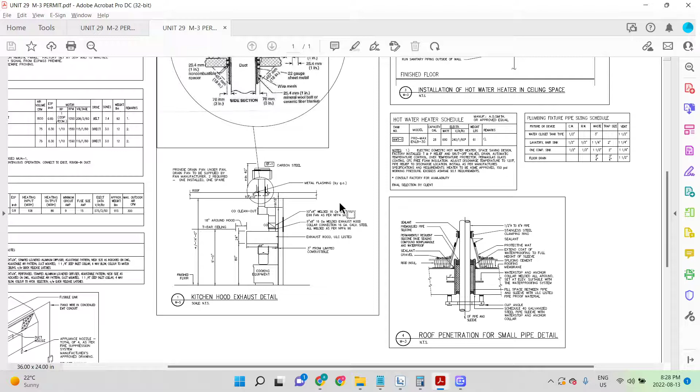Hello everyone, this is Anam from Eden Plumbing, and today we're gonna go into a little bit more detail on a very small job. I'm only gonna discuss the small jobs in the videos because the big jobs can become repetitive and you lose concentration. As long as you guys can do a smaller job, a bigger job is pretty much the same.

So today I'm gonna go into sections. I'm gonna make four sections. I'm gonna show you how to do the underground drainage. The next one will be how to do the wall plumbing. The third one would be how to do the ceiling. Fourth will be how to do the fixtures and combining everything together and coming up with the price.

So these jobs, as long as you know the material, you can price it. I've done a couple of them. My estimate, just roughly without looking at this, would be around... one, two... You're looking at around 9 to 10 thousand dollars worth of fixtures and piping.

So around $5,000, 4,500 for fixtures, and you're looking at 1,500 for underground, so that's 6,000, 2,000 for the wall plumbing, that's 7, 8,000, and then another 2,000 or 1,500 for upstairs. So 9,500. To do the job, it would cost me

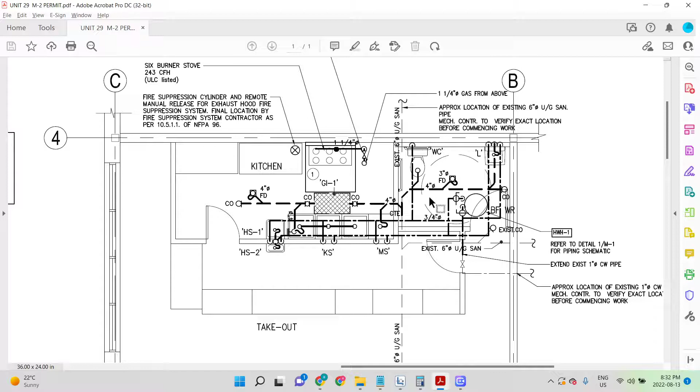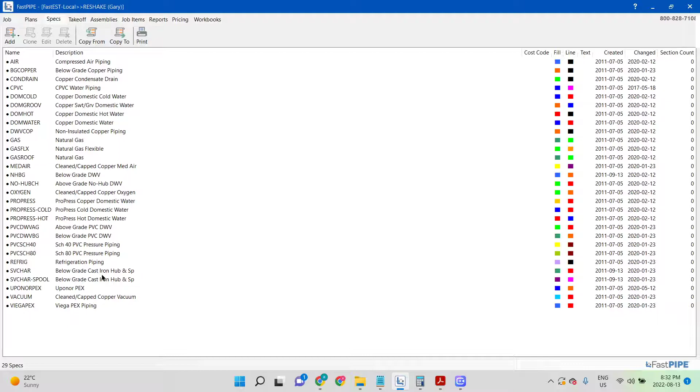Again, I'm gonna do the takeoff. Since it's underground, I'm gonna use inside pipe. Oh, I don't have it, so I'm gonna go here. Go to specs. Delete all these, and then paste it because I did that recently. Now I go for my underground.

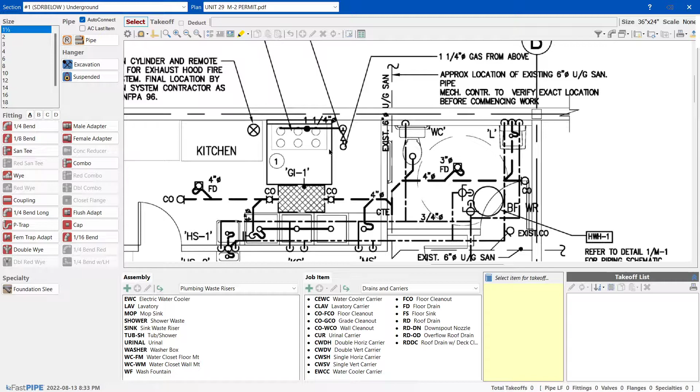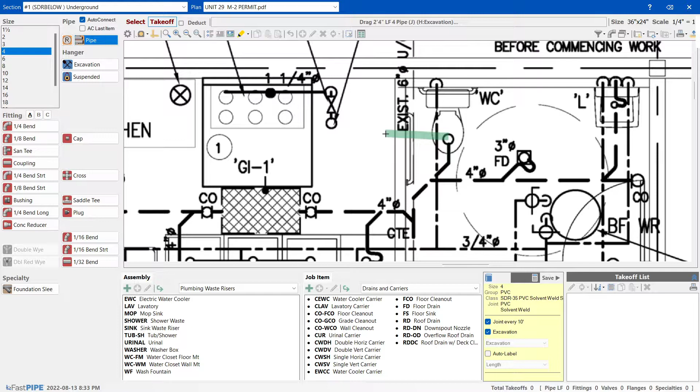It says connect to existing, everything connects to here. So there's a pipe that's going here, probably there's a clean out. I'm going to assume there's a pipe, so I'm going to put the scale as quarter inch. I saw it earlier. Let me confirm this. 1.8, 1.7. So we're good. We're not 3 feet or 6 feet or something. So the scale is right.

Let's continue. 4 inch coupling, 4 inch coupling, 4 inch Y, a 4 inch Y to bring it up, 4 inch SDR, street 45, street 45. Now I need another 4 inch Y for the vertical side, another street 45, 45 here. A clean out because you're raising it. Yes, so the clean out should be here. You have a 45 here.

This pipe can go this way. Here's another 45 going that way. I'm going to start this line first and see how this is. It's a pretty common one that we use all the time. So we are going to do this properly now. I'm going to put a 4 inch Y here. And then I'm going to, you know what?

I'll do it exactly that way. The venting works. They would allow me to do that, so there's nothing we're going to do. So, 4 inch Y, 4 inch 45. I'm going to put a 4 by 3 inch adapter reducer here. Everything becomes 3 inch: 3 inch Y here, 3 inch 45 here, inch and a half, 3 inch 90 here.

Now riser, because we're going to raise it up 2 feet. I'm going to raise it 2 feet. And then I'm going to put a toilet flange, and that completes my toilet. Now I'm going this way to my floor drain. Remember, we have to do venting as well, but this way the design the engineer did sort of works for us, so we don't have a problem to do that.

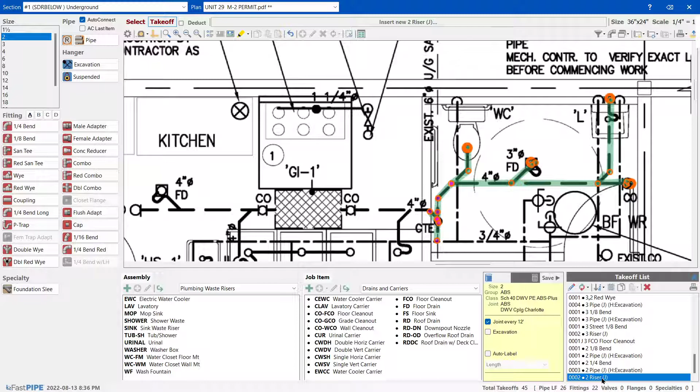2 inch Y, 2 inch riser, and this I leave it for here. You know what I'm gonna do? Yeah. So this is perfect. Now I move to this one, and let's see what this is. This is a mop sink. So we already know what a mop sink is, right? 4 inch, 4 inch Y,

4 by 3 inch reducer, because every time you connect SDR pipe, I don't know if you noticed, but this is the specs we are using, right? So this is very important. This is the specs we're using, and this is your System 15 SDR pipe, which is 4 inch and above. This is your ABS pipe, which is saying that any pipe that is 3 inches or less will use ABS. Any pipe that's 4 inches and above, we're gonna use SDR.

You know what I'm gonna do? To make it easier for you guys, I'm gonna, let me see, how did I do that? I did it before. No, no, there was something. Oh yeah, no, that was a complete package. I don't want to change the complete package. I want to have two separate colors. Anyways, I'm trying to do the color. I'll figure that out, as I don't have a color code.

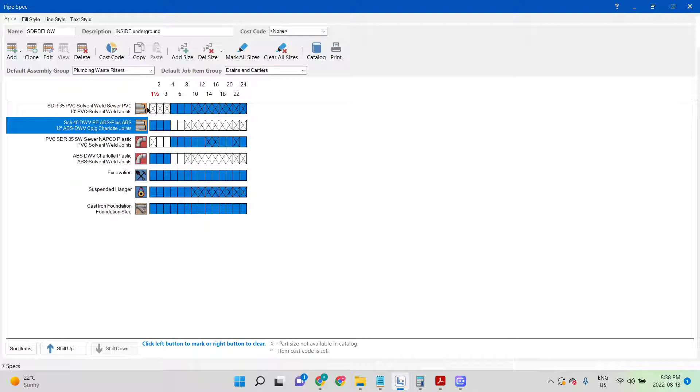Anyway, so if it's 3 inches and less, it's ABS. If it's 4 inches and higher, it's a System SDR pipe. So therefore, when you're changing this pipe, how are you going to connect them, right? That's the most important question. When you come across pipe changes, you need to use a special fitting, right? So that's what I used over here. It's 4 by 3 inch.

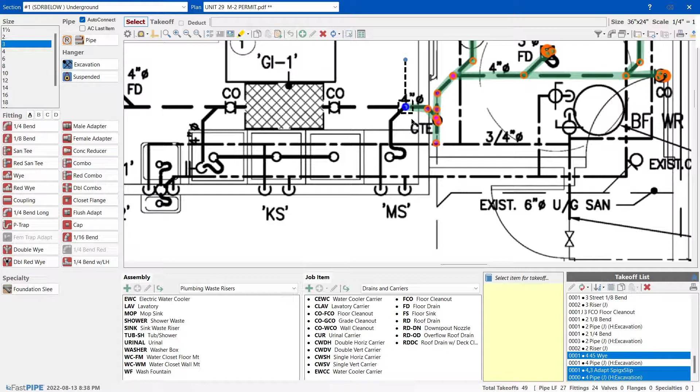We call it a 4 inch SDR to 3 inch ABS adapter. So it's 4 inch SDR conversion to 3 inch, and it's an adapter. A lot of plumbers in the field would know this. This is more important for the person who is an estimator, because this information is not shown to you over here. So this is very valuable for that. So, anyways, this is 4 by 3 inch. We added it over here. Now 3 inches come in here.

All of a sudden, you will see that it'll start accepting 3 inches here. The minute I take this off, let's say this is a 4 inch pipe. The minute I put 4 inches, it's gonna start accepting me, right? But the minute I put 3 inches, it should not accept me. You see, it's not accepting me here. But the minute I go 4, so this really helps, right? Now if I do, watch, beautiful.

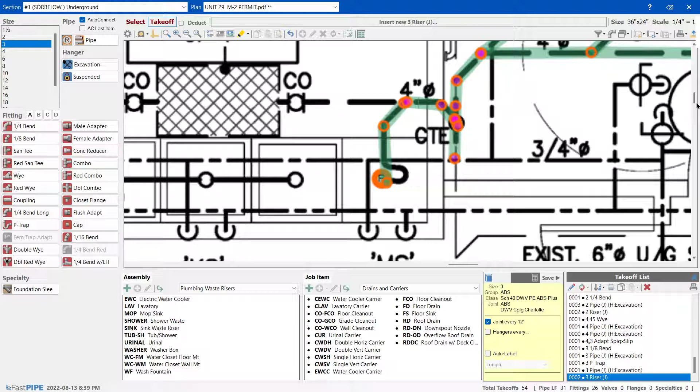So it's a mop sink, it's not a floor drain, so a pipe just sticks up, and that's pretty much it. In the next videos, I'm gonna compile a lot of on-site examples, so you will have a better understanding. Now you can see that I never put a vent for this one.

I put a vent for this one as this was wet vented. That's why if you notice, this is a 2 inch line, right? If you look over here, it's a 2 inch line. This is gonna be a 3 inch. This is 3 inch. So basically, I wet vented, flowed into this. But when I do this, I'm not wet venting anything.

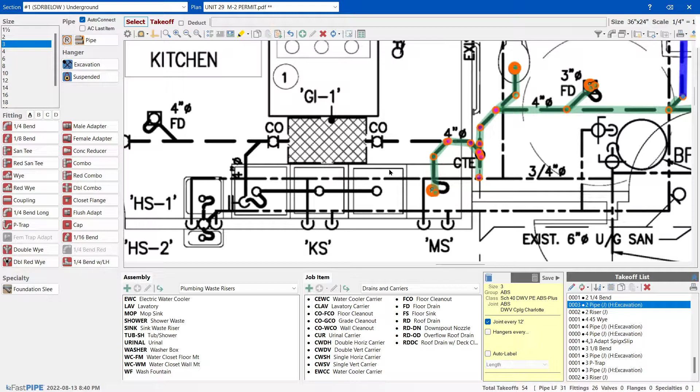Yes, I can use a circuit vent, but there's no space for a circuit vent. So what am I gonna do? Actually, you know what? There is a vent over here, but to be honest, I never did it, so I don't know if I'm allowed to use that. What I'm gonna do is look for a sink nearby to see if I can wet vent that. I don't really see one. I see this sink here, but it's upstream.

This drain, I have no idea what they're trying to do with it. They didn't even connect it to anywhere. Are they gonna bring it from here? Then we have to connect it from this side. If this was downstream of the grease trap, beautiful. I just bring a 2 inch pipe up and connect it here and here. There's gonna be lots of pipe here, so this idea is not gonna work.

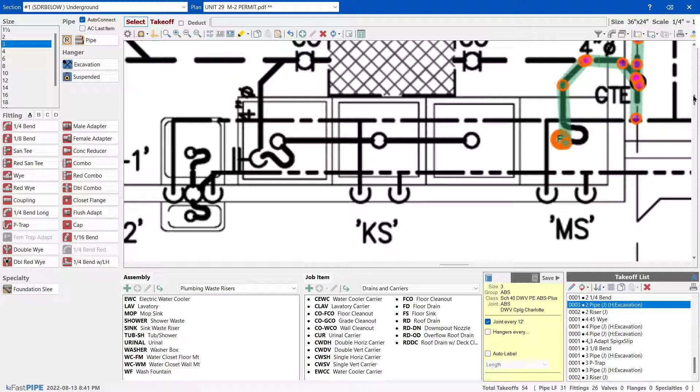What I'm gonna do is just keep it simple. I'm just gonna cover myself by a, what do you call it, just a fixture vent, individual vent. That's the term, individual vent. Gotta revise my code book.

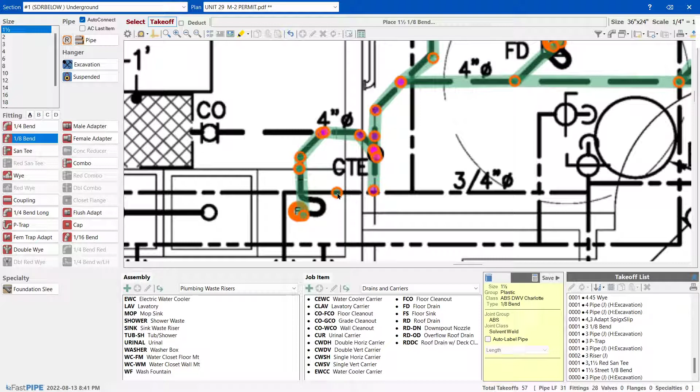You get your 2 inch, inch and a half, right? Inch and a half, 45. Now I can put a 45 here. So this is what it does, and then I can just put a pipe straight up into this pipe right here. I can move it a little bit here to make it easier, right? And inch and a half, 90. Since I am bringing my pipes from that area, afterwards when I do the other ones you will remember.

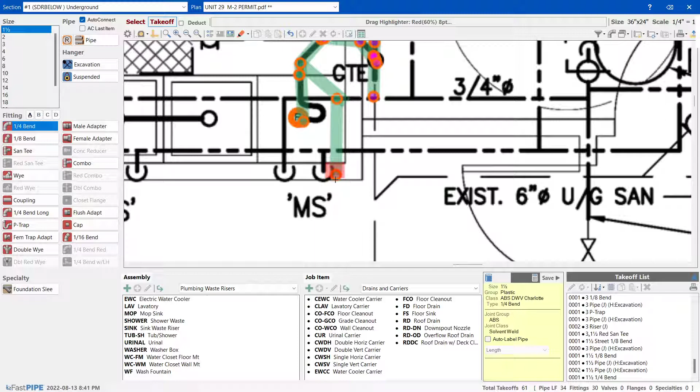I'm gonna mark this. Why it's important to mark this, you will know in my next video when I do the wall plumbing. These are the areas that I'm marking where the pipes are sticking out. So 2 areas we have marked. We have 2 inch pipe here, we should have an inch and a half pipe here, and then I need to have a riser, so I'll put 2 feet riser. 2 feet, not 21 feet. This is done. I continue here.

Now in this drawing, you will see a grease trap, but a grease trap does not just simply have that. It has a lot more things in there. So we're gonna put a 4 inch wye, right? And then we're gonna connect this. It didn't pick it up from here. Why didn't it pick up? It's a 4 inch wye, so I did the right job. That's fine.

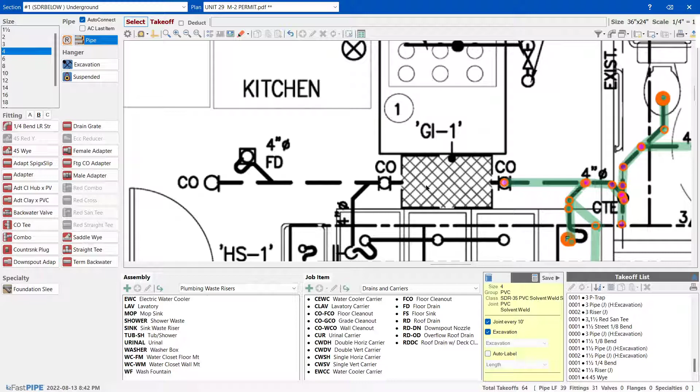The rule is you gotta put a clean out, which they show you, and a vent upstream and downstream of the grease trap. They both have the clean outs here, but they don't have the vents. So we're gonna put some vents. I'm gonna look for a close by wall when I look for vents. I can put a vent here, this is close, but I would like to put it here. Why? Because then I can connect all this in here.

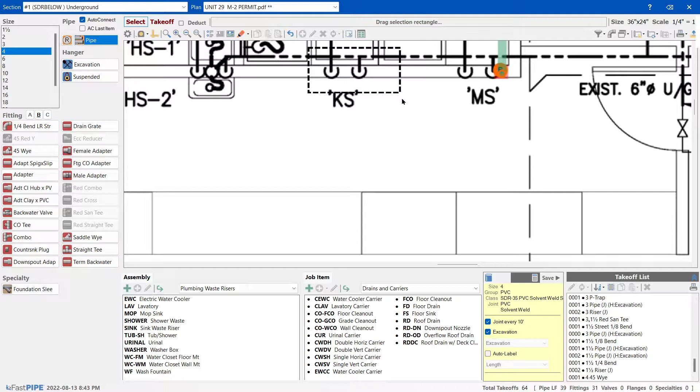Even if this wasn't here, why did I bring it here? The reason is I will always choose a wall where there is a sink. You have a sink here, you have a sink here. For example, I'll just open one of the other jobs to show you what sink plumbing looks like, because I should make more of these elevation drawings, you understand?

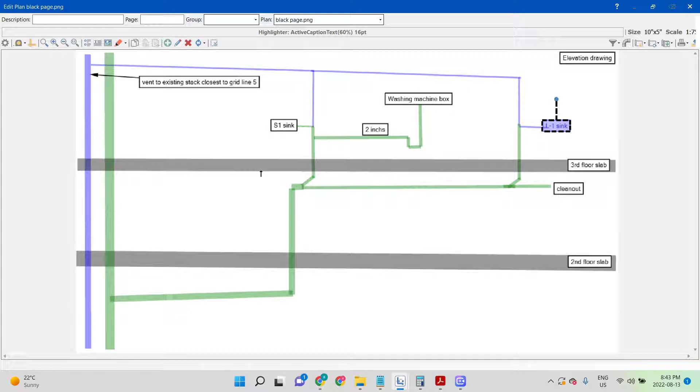So if I put another vent from here, I can just connect it. For example, I can just connect it like that to this, or I can just go and connect it up there, right? So these are really good areas to focus on when we are trying to do wet venting, or when we are trying to bring vents for the other fixtures. And this is a very cost-effective way to do it.

Now I use a street 90, street 45 to angle that fitting there. Now it's angled. I use another 45 to make it horizontal. And then I use a pipe this way and then this way. And then I put a 90. Come on, come on. 90 and a riser for 2-inch. And since I was again coming in the wall, I go this way. Beautiful. Now I'm going to continue to this way over here.

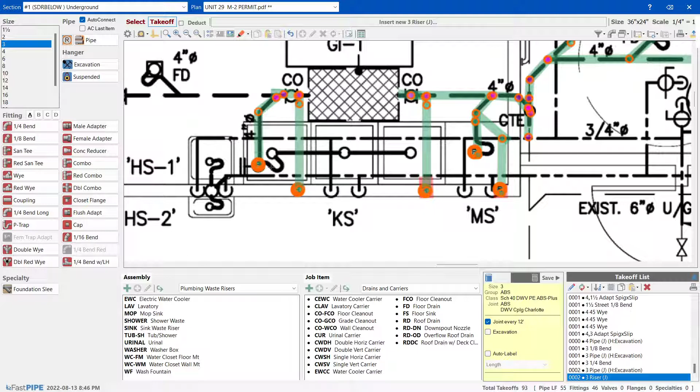So anyway, this is a 4 by 2. It's in here. It's up, and we leave it at that. Now we keep going backward, and for example, if this was in here, I'm going to assume that. I shouldn't assume it, but it's a small job. It really doesn't matter to take a risk. We could call the owner, the client, for this information. He won't have that. So trust me, you're not gonna win anything. You just have to assume at this point.

If it was a bigger thing, you'd send an RFI. It's a small job. They don't even care. They don't even know what an RFI is, some of the contractors that we work with. So anyways, that is in. Why I didn't need a 3-inch.

I'm gonna go back. You know what I'm gonna do? I'm gonna show you something else. So, for example, this is 3-inch. This is a 3-inch pipe, 3-inch riser, right? But let's say you don't want to put 3-inch. So what you're gonna do is you're gonna change this. So let's say, for example, I change this to a 3 by 2 inch wye, right?

And you did all this work, and somebody says to you, no, no, no, it's supposed to be all one thing. So instead of changing everything, you can just go here and you can say size. You can say 3-inch, I want to make it 2-inch, and boom, everything becomes 2-inch. This is a very small example, but if it was a big job, you could have done that.

You could have done that. Here's another way of doing this, 2 inches. So it's very nice software. If you did a lot of work, it will help you save it.

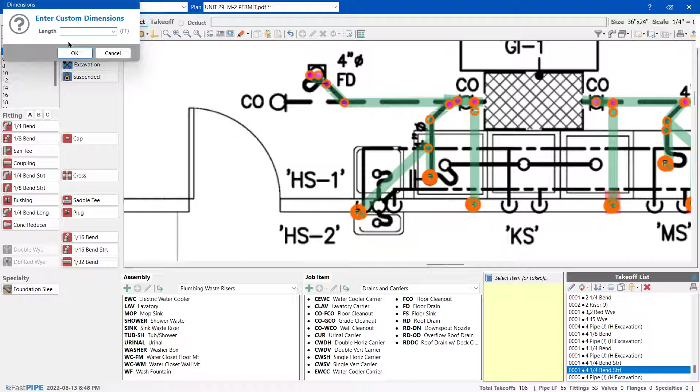But let's come back to this. So 4 inch here. I can do this 4 inch, I can do this 2 inch. The code for floor drain is you can keep a floor drain as long as it's bigger than 2 inches. A lot of inspectors don't like 2 inches, but they can get away with 3 inches. But the problem is 3 inch is more pipe, and it's more expensive pipe. Can you imagine that? So why would I use expensive pipe? I'll use a pipe that will make my inspector happy, a client happy, and it's cheaper. So hence it's 4 inch for now.

4 inch floor drain, and that's done. Now I come back clean out one 45, one street 45, one 90, and one clean out.

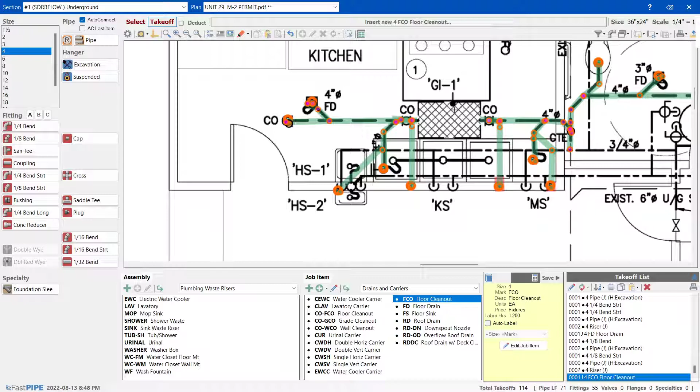Beautiful. How do you like it, guys? So far good? Okay. So now, again, this riser is coming up, so it's marked. This riser is coming up, it's marked. Where is the vent for this one?

You know what I can do? This is what I'm going to do. I didn't think of the vent for this one. So this one's gone, this 4 by 2 inch is gone. What I'm going to do is I'm going to give you a vent from here. So if they had another fixture here, I couldn't take my Y from here, but there's nothing behind it.

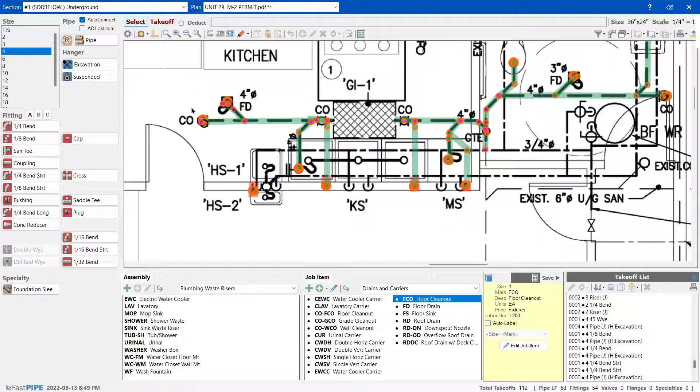Clean out is not called a fixture, just an opening. There is no more fixture upstream of this trap, so I can even use it here. This part, technically, this part also becomes this part. But the minute I put a fixture here, this part is branch drain, this part is fixture drain, this part becomes branch drain.

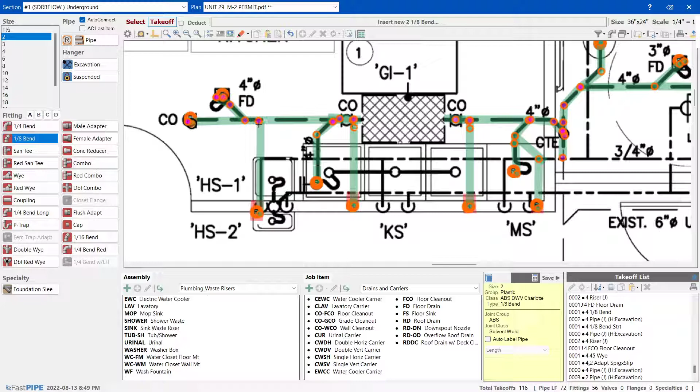So that's why we're not gonna get into that now, but because of that, what I understand, I'm gonna go here 4 inch, 4 by 2 inch, and I'm gonna try to wet vent this floor drain with this pipe here. So I'm gonna add another 45, and beautiful.

So this is what I did. With this software, not only did I estimate the job, but I also did a material takeoff. That's why it's worth it to do a little bit of detail and go ahead with the design. You can simply just follow this thing and add 10% and that's fine. But then if you do get the job for the material takeoff, you have to redo everything again. So that's why I like to do one thing and I like to be more accurate.

Hello, everyone. Okay, so this is part two, where I'm going to be showing you the wall plumbing for this job. This is the underground that we have done. I'm just going to verify my markers.

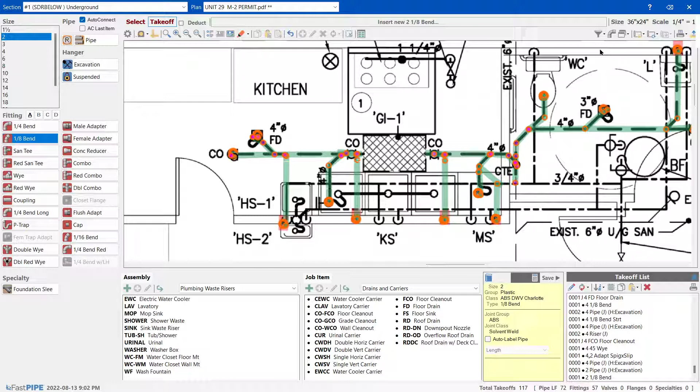1, 2, 3, 4, 5. I'm gonna see if it's only five we need. 1, 2, 3, 4, 5. Yes, five. So now we're gonna start the wall plumbing.

The wall plumbing, we're gonna go and use System 15 pipe. You don't really need to use System 15, you can use ABS. But I like to use System 15 for my commercial jobs. That's what the City of Toronto always asks you to do. You can get into trouble with some inspectors if you don't, but you can get away if you really wanna, if you really know what you're doing. We like to try System 15 and then see what we can get, so we are always covered.

So this is pretty simple. For a wall plumbing, I'm just gonna use a coupling. It's a 2 inch pipe there, I know it's a wet vent. This is coupling, 2 inch riser. So this is pipe coming from the ground.

Now I'm gonna use a T for my thing, but I'm going to reduce it from the top. So it's going to come out 2 by inch and a half by inch and a half, inch and a half coming to the sink. In case if my drain, I don't want to break all this, I can just go straight up here, I might also use a 90. So I'll use a 90, have this vertical pipe in case if I don't want to break all this and just bring it up from here, right?

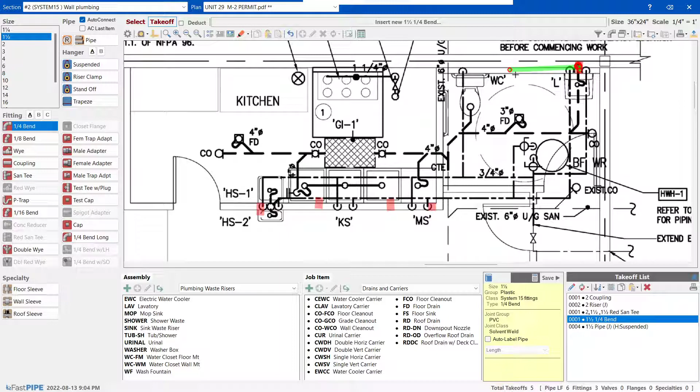So I'll use a 90, and then I'll use... no, see, you can't use a 2 inch 90, so we have to use inch and a half 90. So inch and a half 90 here, in case I'm gonna flip this.

The whole thing is this way. Yeah, this makes more sense. And then a test cap, and then a pipe a little bit here. But this pipe that's here, usually I cover it in my riser, so I'm going to give an 8 feet inch and a half riser. That will pretty much cover it. 8 feet inch and a half riser.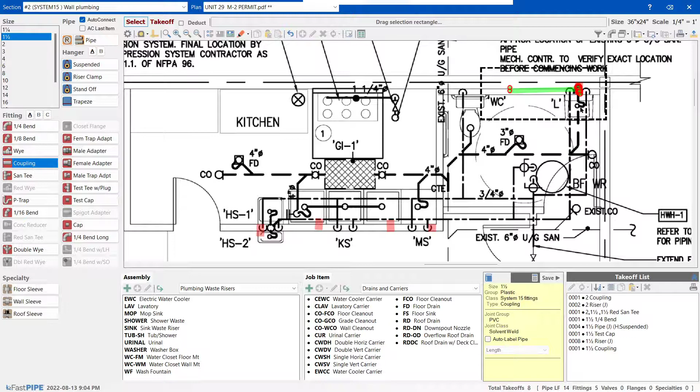And then I'm going to give a coupling for the top because on top I'm going to change it to XFR. So that was pretty straightforward, that's what I'm going to use, the same one I'm going to use over here. Actually, you know what I'll use? Yeah, I'll just use that because I can be precise for this one. This is pretty straightforward. This one, I have to cut the concrete for, so I'm not going to be picky on that one.

So I've done that. Now what do I do? Should I bring the pipe this way or that way? You know what, I'm gonna bring everything this way. So that's how I designed it, I'm gonna bring all these little lines over here.

So this is the wet vent for this, it's an inch and a half pipe coming here. I know that if I go into my previous one, I can find the pipe size of this one, and it will tell you over here. Look over here. So if I click on it, it's inch and a half over there. So that's how I know it's inch and a half.

I'm gonna remove that, continue with my work. It's inch and a half coupling, but this one I'm gonna take off, inch and a half coupling, 8 feet riser, inch and a half coupling here. No, actually, you know what, not 8 feet riser, just 4 feet riser. Why 4 feet? I'm gonna show you, I'm gonna show you 4 feet riser because it's in the same wall. Coupling and a 4 feet riser.

This again is vent for your grease trap, I know that. So here again, this, copy paste, done. 4 feet riser connected, this one is inlet riser, same thing. So now what do I do? I put a 90, I put a T because I'm connecting. I'm gonna go like this by the way, so I'm gonna go like that, right? So 90, bring it here, T, extending another T, and then another T.

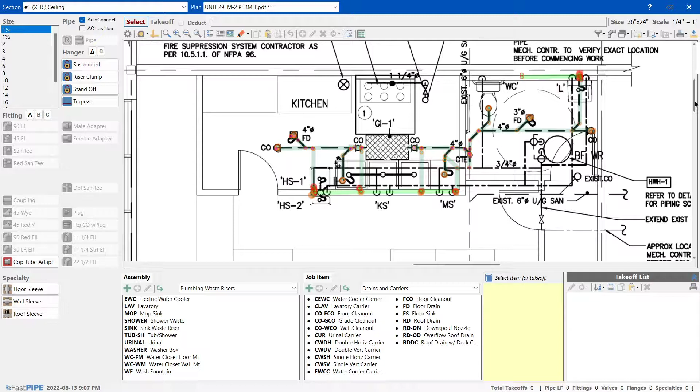So guys, this is your third video for your estimation for this small job that we're doing right now. We didn't get the job yet, but we're pricing it. In my first part 1 and part 2, I've shown you how to do the underground, how to do the sanitary wall plumbing. We still have to continue to do this wall plumbing for the water line, but we always do sanitary first and then water line afterwards. So I'm going to continue and do the ceiling plumbing.

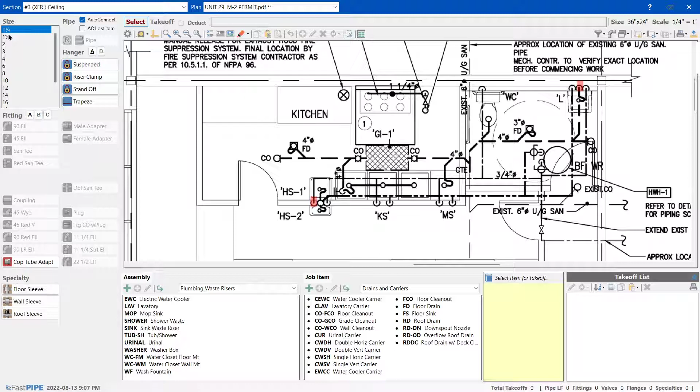So now you can see why I have these 2 marks, because these are 2 marks that I need to connect to. So where am I going to take this? You know what, I'm going to take it in the middle somewhere. This is inch and a half pipe, I'm going to bring this inch and a half pipe. I can design it any way, right? I'm gonna do it this way, I'm gonna do it this way.

Okay, bring it out here. This one, bring it out here. Bring it out here, and then connect it back with 2 by inch and a half by inch and a half. So now I'm gonna start giving fittings. First of all, it's couplings everywhere, coupling and coupling.

2 inch riser, 2 inch riser. 90, 90, 90, 90 here, and there too, yeah, 2 inch and a half by inch and a half. I'll bring it a little height difference, 2 inch and a half by inch and a half connected here.

I'll give another 2 inch offset for 2 inch pipes, so I have some fittings. I'll add a couple of 45s for 2 inch, two of them, and I'll add 45s for inch and a half for contingencies, right, left, whatever. Then I'm going to put a 2 inch riser for two, and a 3-inch riser for 3, and then an increaser.

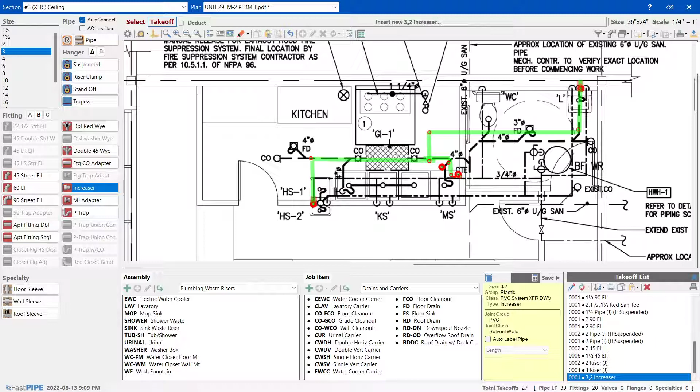Because when you terminate outside, you have to use a 3-inch pipe. That's why you're seeing all this. So now our venting is also finished. Now we're going to start part 4 of the video, which is basically the water line for this job.

The water line for this job is going to be cold Uponor. Did I use Uponor too? Yes, I'm going to use Uponor cold. Whenever you use Uponor, it's cold.

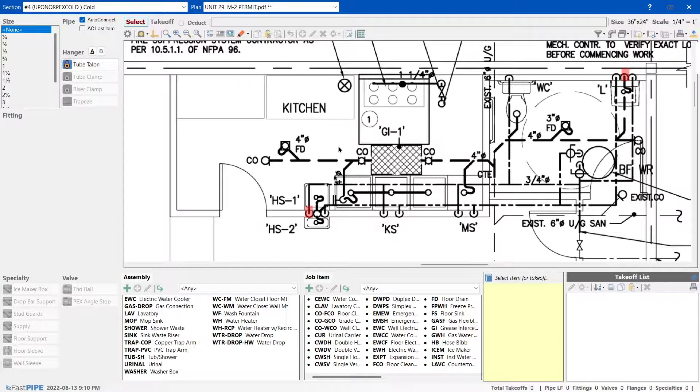For now, this doesn't really matter, so this is gone. Now I'm going to study the water line. You look for where the water line starts.

It starts here, approximate location of this 1-inch cold water pipe, mechanical contractor verifies. Telling it's here, it's giving you a shutoff valve, telling you there's a water mixing valve, whatever. After that, just go and do your thing. It says BF, that's barrier free, the water closet, the water washroom.

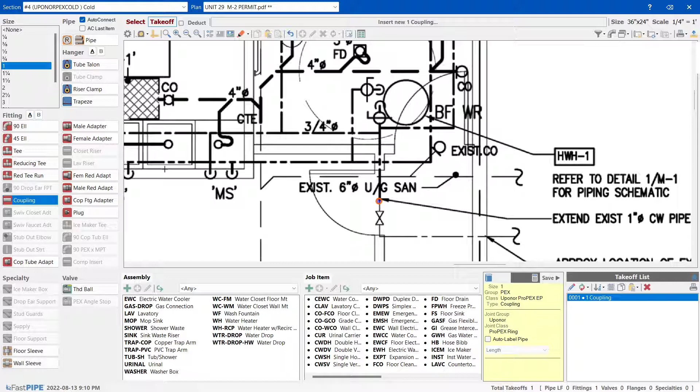What size? It says 1-inch, so I'm going to start with 1-inch. I already have a valve. I'm going to put a coupling here, and then go ahead, it's 3/4 inch here, 3/4 inch going to somewhere. I don't even know where.

Where is my water meter? Water meter is right here. Hot water is here. So this area is always tricky because everything's connected. But I'm going to try to make sure I take the 1-inch line and distribute 1 by 3/4 by 3/4 from there.

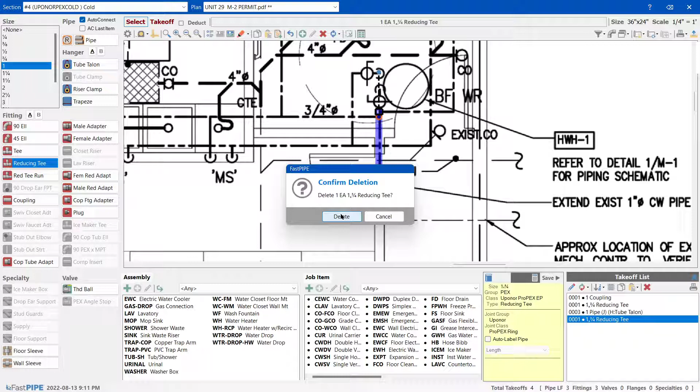So what I'm going to do is take 1 by 3/4 here, 1 by 3/4 here. No, for the second one, 1 by 3/4 by 3/4, 1 by 3/4 by 3/4. And then when I go to the 3/4 side, I'm going to take a reducer.

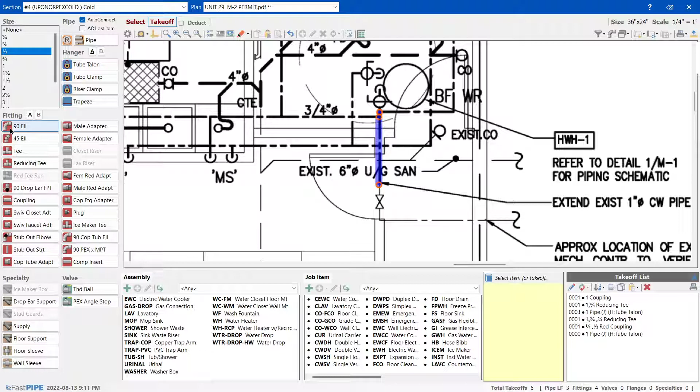Where is the reducer? Right here. Reducer is going to be for this side, 1/2 inch. Take the 1/2 inch line, I'm going to take a 90, another 90 for down, another PEX valve for down for later, another plug for now. This is the typical thing I'll be using for a lot of things.

So I'm going to copy it, paste it, and keep it ready. Then what I do is go back this way. No, I've got to finish the water heater. So 3/4 was going into the water heater.

I'm going to put a 90, another 90 just so they bring it here. I'm going to do a female adapter because that's what I need to connect it. And then I'm going to use a shutoff valve for the cold side. So that's where I need to connect it, whatever the small pipe is going in there. So that's done, water heater is done.

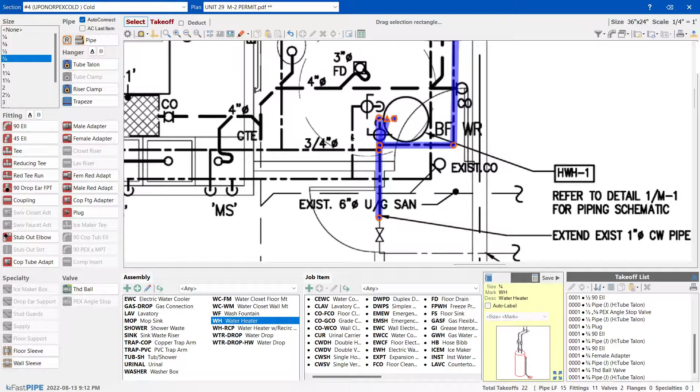I have another way to connect the water heater, which is by using this water heater assembly, but I'll just keep it, I won't use it. I'm just showing you how to do it manually now. You get more control manually, a little bit more work, but more control. Water heater is done, this is done.

Now I'm going to come here. You know what I can do? I can just extend this pipe here, so I don't need to take it from it. That's exactly what I'm going to do. I'm going to go here, put a T here, put a T here, and then take this pipe here, and 90, 90, 90. Delete one of these pipes because we don't need 3.

Put another plug here, put another PEX valve here, and I'm good to go. So this washroom is done. I will eliminate this line right here. I could have done it, really doesn't matter. I'm going to continue.

1 by 3/4. Why is it instead of quarter? No, it's already 3/4, it's already 3/4. 3/4, 3/4 by half, reducing tee. It's right here, 3/4 by half.

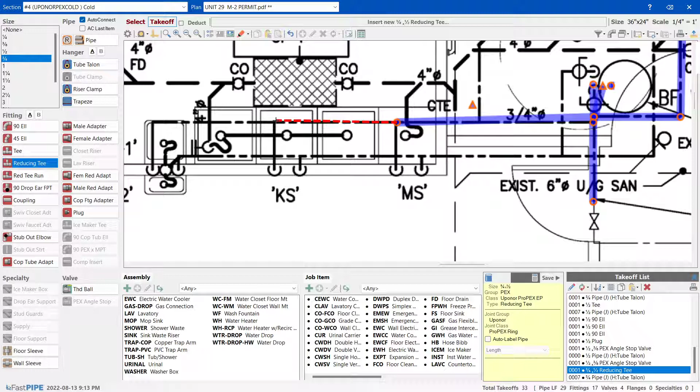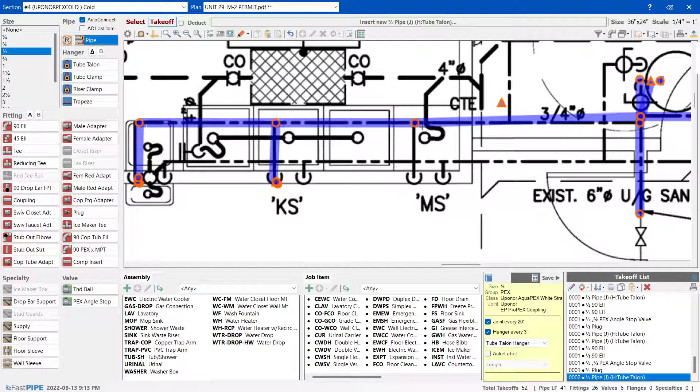Beautiful. I got one. I got another one. Now I'm going to do 3/4 by half, half, right? I can give 2 sinks half, which is not a big deal. So 3/4 by half, half. This right here, 1/2 inch 90, 90, 90. Drop it. Same thing, drop it, and just extend this and drop it. So beautiful. That's how your hot line, cold line is done.

Now we're gonna do hot line. So I go back here, I use Uponor. I've shown in my previous video how you can change the colors and stuff like that. If you need help, send me a comment and I will let you know.

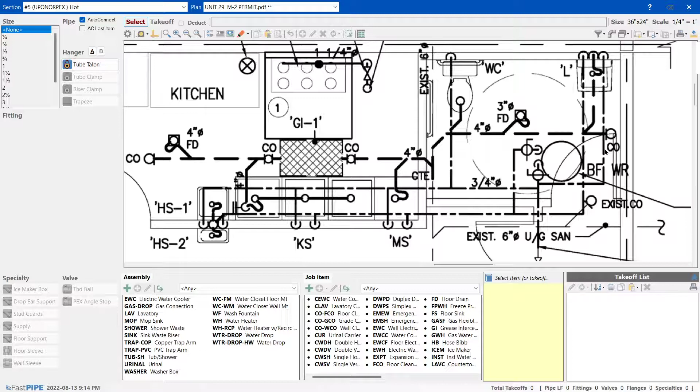In here, I'm gonna now start with the hot side. So I'm gonna again start with the female adapter, start with 90 up, another 90 in case you want to go right left, just as a contingency. Here, extend this pipe here, doesn't matter. So this is only half inch going this way, 3/4. So I'll go 3/4 by half by 3/4. That's what we need. 3/4 by half by 3/4. Right here. Boom. Half inch will go that way.

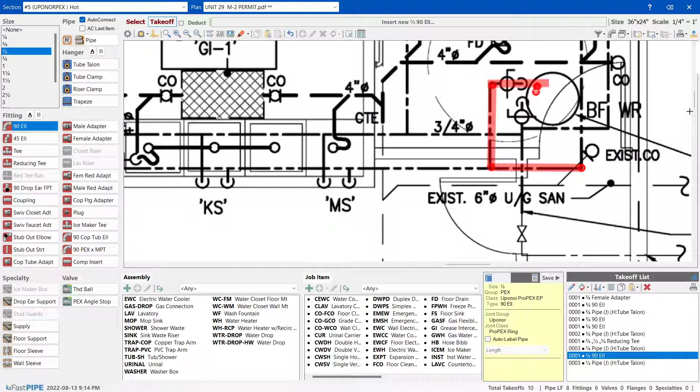You will see it'll start picking up. Beautiful. Here and beautiful. That's done. Right? Now going this way, what happened? Go here. 3/4 by half works. No, no. 3/4 by half first. 3/4 by half. Give you this one. Then 3/4 by half. Give you this one. And half inch 90.

Go here, copy paste, copy paste, copy paste. Connect this to this, connect this to this, and what do you know, sir? Your hot water is done.

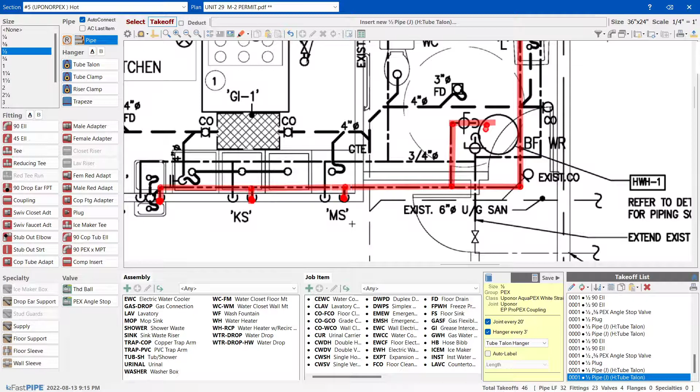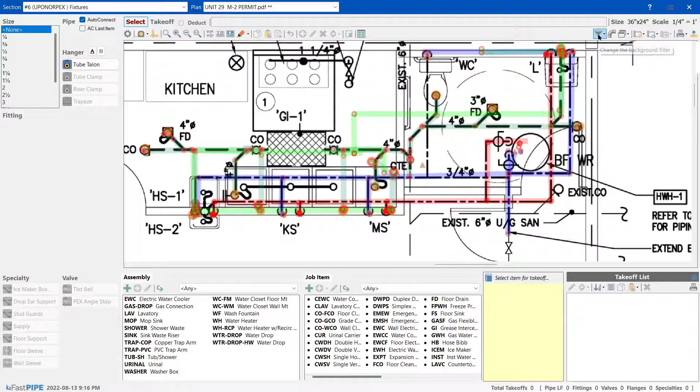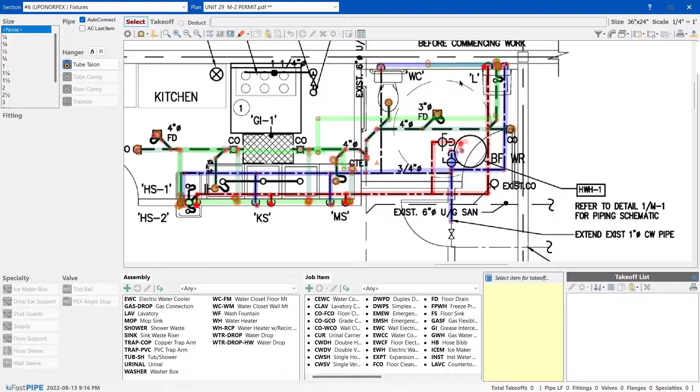You know what I'm gonna do? I'm gonna change the color of system 15 pipe. Yeah. Okay, I can edit it completely, right? I go here and I can change this to, what do I change it to? Some nasty, this weird color, right? And now when I do that, and if I go here, you will see that that pipe that was right here will become some next color. You can see the color changed. I like that. Okay. And the venting again is same.

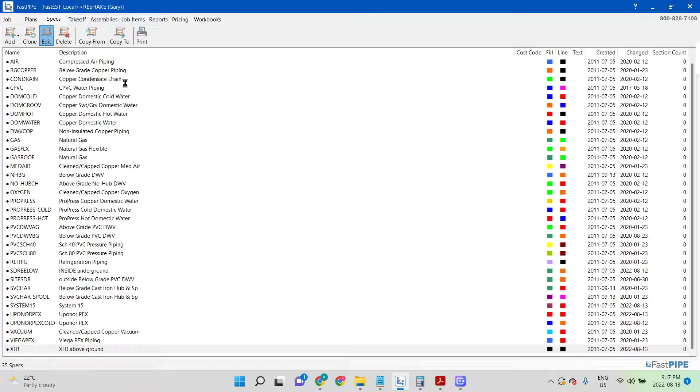Oh my God. You know what? I can change the color for the venting too. That's what I'm gonna do. Change the color for the venting. Edit. Everything is green. Like what's going on over here? Red. No. Red was for the thing. It's gonna get confusing. I don't have much color option. What is this? I'm gonna use purple, and I'm gonna give it less transparency. Let's see.

You will see it's gonna be nice. Some nice color painting. Some colorful drawings here. What? Recalculate. Calculate. Now if I look at it, yes, you can see everything is just beautiful. Nice colors.

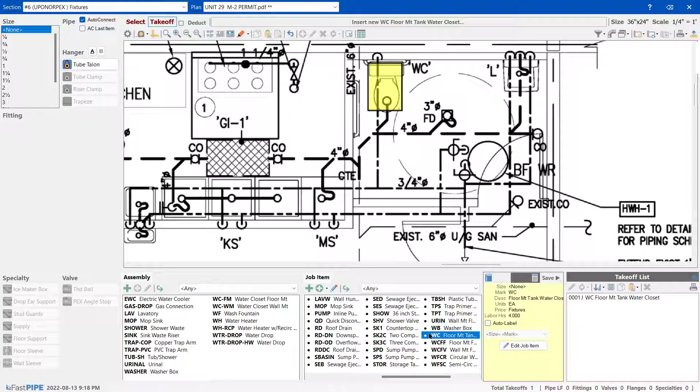Delete all. Let's focus on fixtures. WC. Again, like I said, I'm not sure what the thing is for this type of job. I'm gonna check afterwards, but right now, for the sake of this video, I'm gonna say WC and go ahead and do it. L again, it's L. So I'm gonna go for lav. I'm gonna go fixtures first, lav, and I'm gonna change it to L, and that gives me this, right? A Lucerne probably. Water heater is in the equipment, it's 30-gallon electrical. I've checked the specs for this one, so it's pretty straightforward.

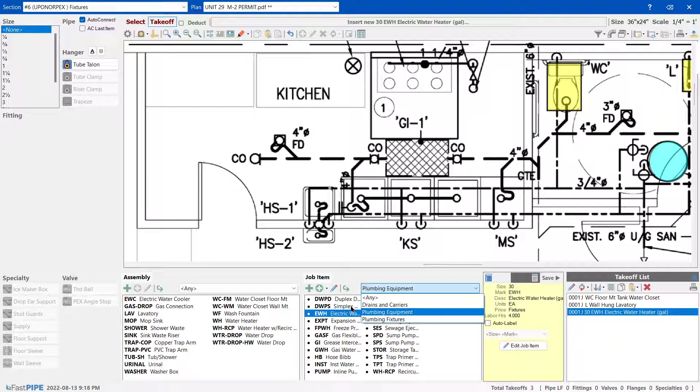Then I go down here and I go for the grease trap. I should see it in this 50-gallon here. They don't give me the size for that, so that's why it's an issue here, but that's okay. Then I'll go back here in the fixture and I'll write mop sink. That will cover me this one here. I will then do hand sinks. I will just click like this and write hand sinks, and this will help me cover this and this.

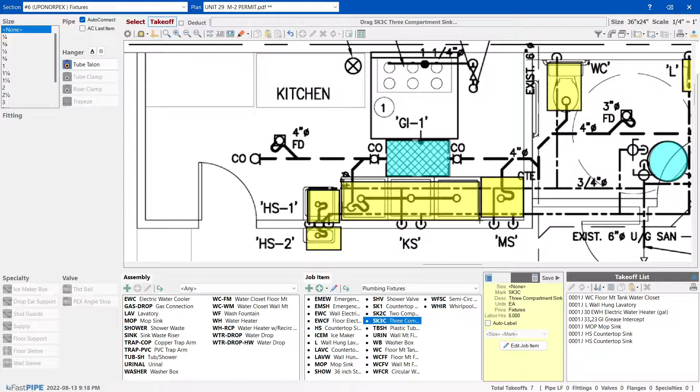And then what I need is a triple compartment sink, which is this. This covers this. I look from the far to make sure my hot side, cold side, all the fixtures are done, plus my equipment is done. Everything is done. Now I'm going to come here. I'm going to recalculate this.

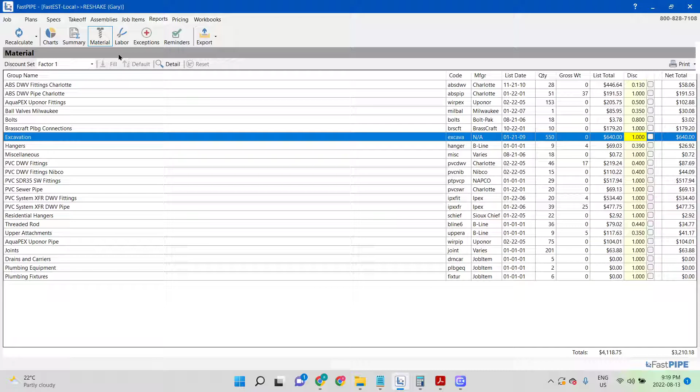All section. It shows me my material cost is this much minus my excavation, which is 600 something. So my material cost is pretty much 2500, which I said was 45. So that was higher there for me. For my labor, it's a small job. I'm going to use 130 because in a big job, you run fast and you get efficient. Small job, you don't really get efficient. So you got to go for the 130% for your labor there.

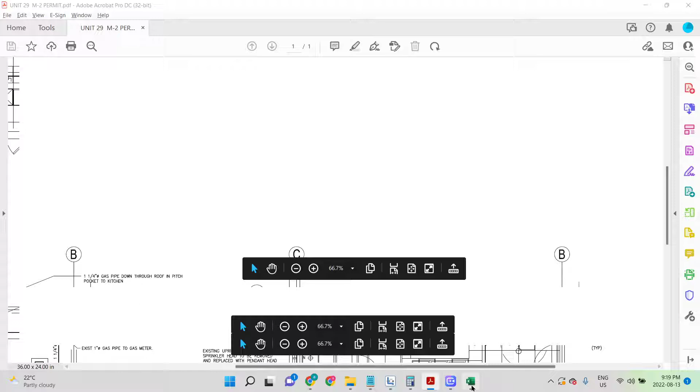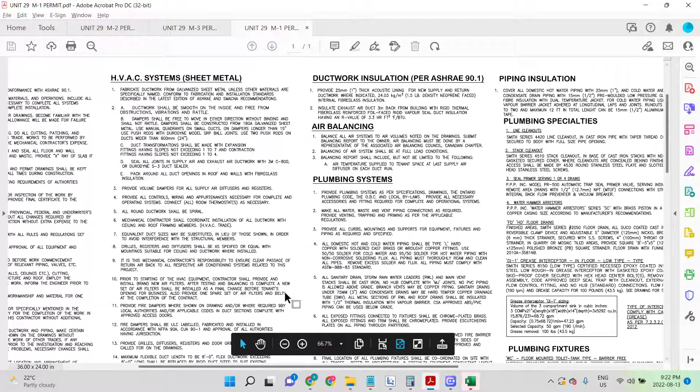So there were three drawings here. In the first drawing, I managed to find it. So I'll show you. Whenever we do the estimate, we do the takeoff, we actually have to read this first. But since it was a smaller one, I knew what it was. But as a habit, you read this first, so you know what material you're gonna take off. Okay, so let's go ahead and read this.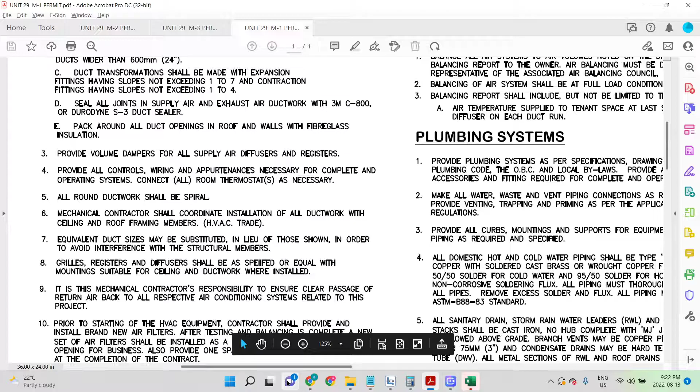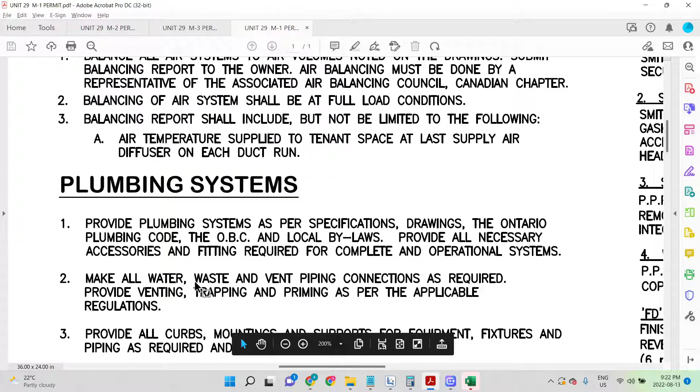That's important. So has to be by plumbing code. Venting, waste and water line is required. Pretty standard. These are all standard things that they add and pretty much copy paste for all the jobs, right? Provide curbs, mountings. This is not important. Water line should be type L copper. This is important. Use 50/50 and 95/50 for hot water. All piping should comply with this.

Oh, so here they said you're supposed to use copper pipe. Nobody uses copper pipe for a job like this, right? So you gotta make sure you write it down. You always price for smaller jobs, you always price for not copper because it's gonna be a waste of time. I've done that. You supply for plastic and then you let them know that this is what you're using.

Another thing what they did is all piping must comply with this. So I'm pretty sure that PEX piping that we use complies with this. You can get away with that. But they always write PEX for the small job here. They haven't. So just want to let you know, make sure we're okay with this sanitary and all that stuff. Vent pipe, cast iron and MJ. No PVC piping is allowed above grade, only copper piping.

So this consultant is extremely strict, right? First he says that, and then look what he says afterwards. No PVC piping is allowed above grade. Branch vents may be copper pipe. Sanitary vents 3 inches, condensate line may be hard tempered copper drainage tube, which is really, really expensive stuff. All metal sections for rainwater leaders and roof drains shall be insulated with half-inch thermal insulation with vapor barrier. CSA approved ABS and PVC can be used below ground. So pretty much straight up, you can't use anything above ground.

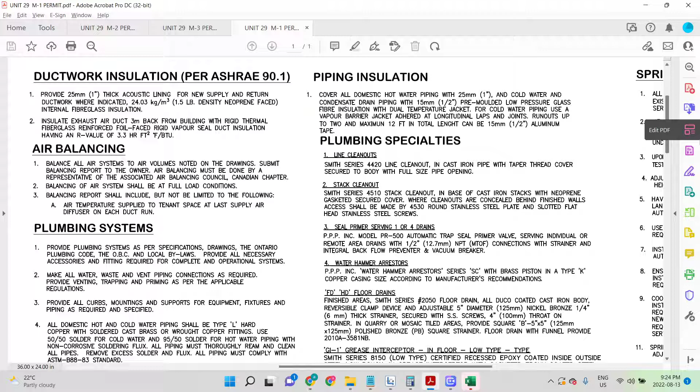Plumbing, venting, it's important. I'm okay. Insulation, if I'm using PEX, I don't need insulation. Again, you mention that in your scope. We're going to show you how we prepare that in our next video. I'll make it an extension of this specific one. I'll use this job as an example. Cleanouts, line cleanouts, stack cleanouts, primers, water hammer arresters, pretty much standard stuff, not a big deal. They're telling you that the grease trap that they want is 50 gpm. That's what they're expecting.

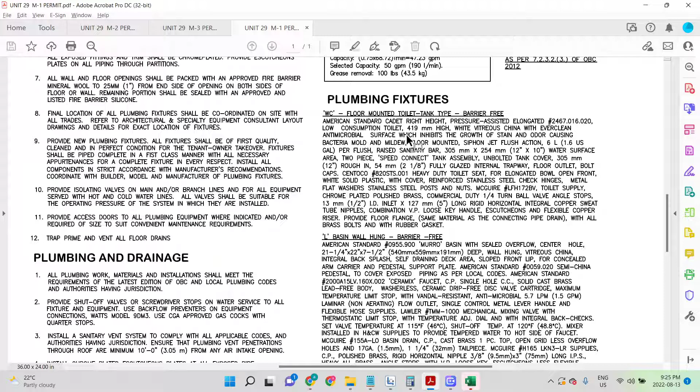It's too big for a typical apartment sink, but if that's what they want, we're going to price it that way and let the GC know that there's alternatives for this. Plumbing fixtures, what they want: pressure assisted, elongated, low consumption one. So they want a pressure assisted toilet and it's going to be a tank one. So those ones come for around 550, $600. We're going to keep 550 to be competitive and we're going to see how it goes.

American Standard Murro is an expensive one. Lucerne is better, but it's no problem. Whatever can be covered. You just have to make sure you do a nice wall bracket for this one. You gotta pack the backside. This thing is heavy. It's gonna fall if you don't do that.

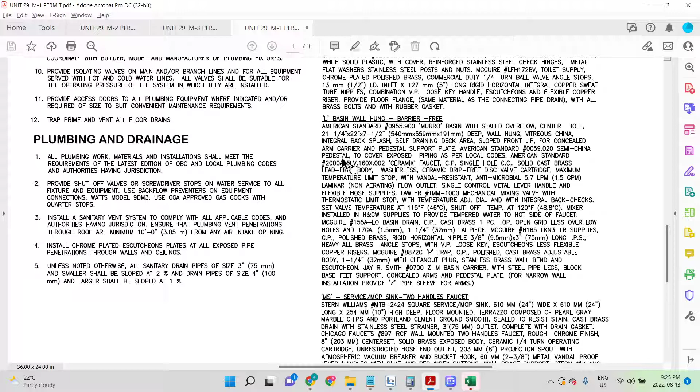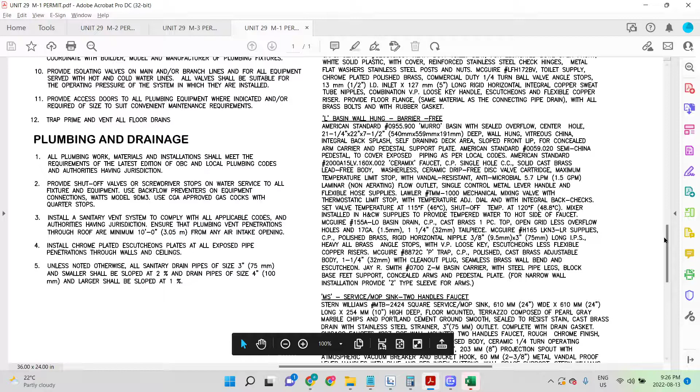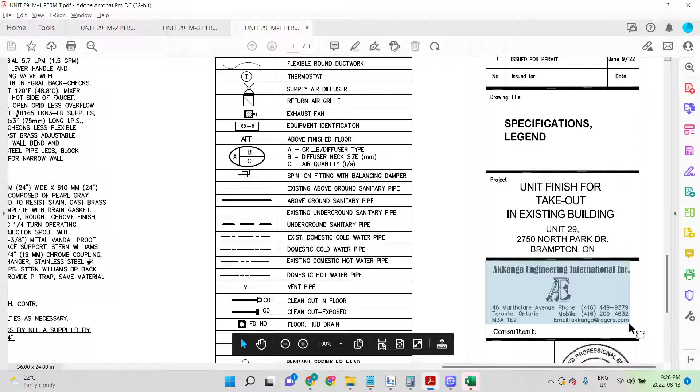Honestly, this job and the other job that I priced looks a lot similar. Maybe it's the same engineer. Let me see the job that I just priced, not 5 minutes ago actually, just today. Let's see if it's the same consultant. They sound similar, but I don't know why he wasn't so picky here. I don't know why he's so precise over there in terms of copper and everything. So let me just look down.

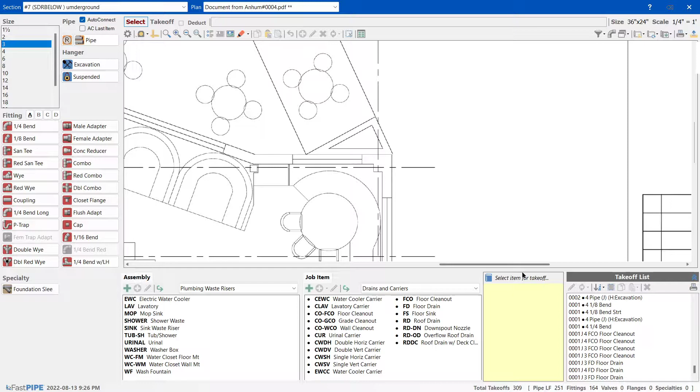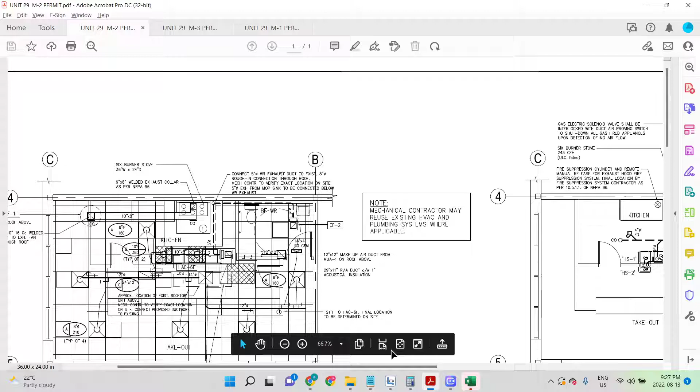Oh, wow, what do you know? It's the same GC, same consultant. Just the way they write, you can always know. They just copy paste everything. For example, I'll show you. Well, it's not open. Well, I figured it out because the way they wrote it, so I'm pretty sure it's a similar thing. So, anyways, I understood what the types of fixture they're looking for. So I'm gonna go ahead and start adding my values to that. Okay.

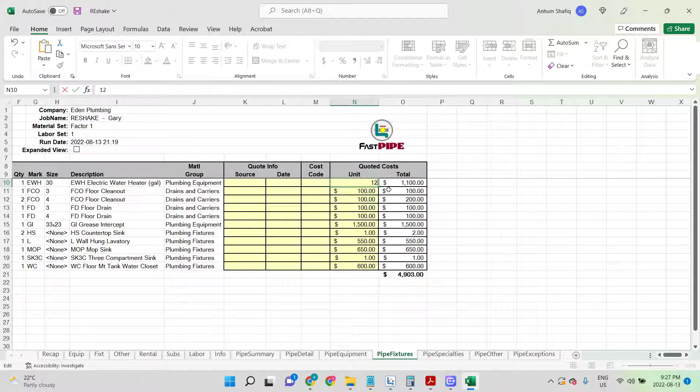600 for the one with the seat. This one I'm gonna make 1200, and voila, 5000 for my fixtures. Everything good. My estimate was 19,000. This came to this much. Oh, it's because of the labor, right? See, this is wrong. But we click over here. Not bad. Not bad, right? So we were pretty accurate, and we did the job. I said 19,600 something before. This is 20,000 something here.

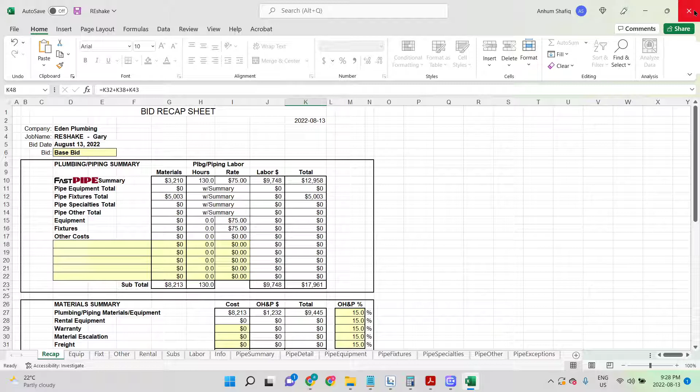And what labor rate did I choose? Let me see. I'm gonna close it, save it, and see with what labor rate I got this with. So it's 80%, right? If I use 100%, I'm pretty sure it will give me the days that I mentioned. Did I say 9 days? Say 8 days, right? 130 divided by 3 people, divided by 8 hours, is 5 days. So it's telling me in basically 6 days I should be finishing this.

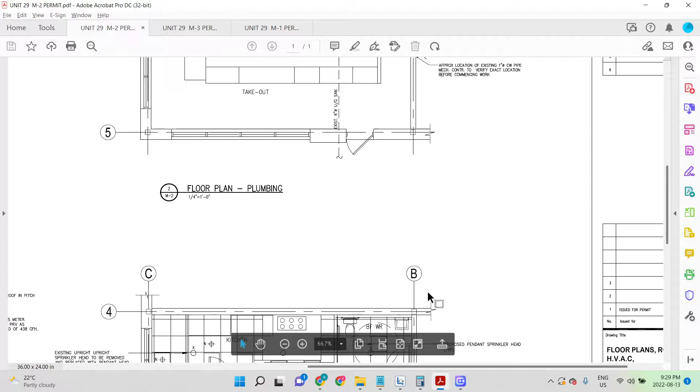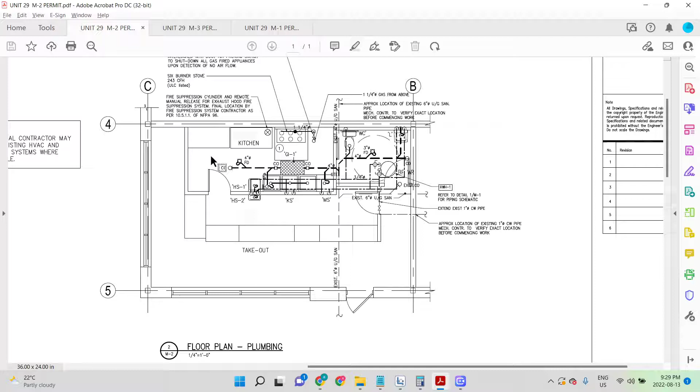If I look at this, it is with 3 people. With 2 people, it's going to be different. So with 3 people, 1 day, 2 day for the underground, 3, 4 day for the upstairs, fifth day, so 6 days. No, it's 8 days work for 2 people. It is 6 days work if you have three guys, but like I said, you can't do much with three guys in smaller jobs. For the inspector, you have to wait. So I think this amount is perfect. I will go with 19,000 because it's a little bit less, and I know that I will still be okay.

So I will go ahead and give this price. So my price for this job would be 19,000. I'll give them a $1,000 discount or 5% discount, and come to the area that I handle. Now, you also need to think about concrete cutting. So let's make an estimate for that. We will make that tomorrow. Actually, it's 9:30, so we'll make it tomorrow.